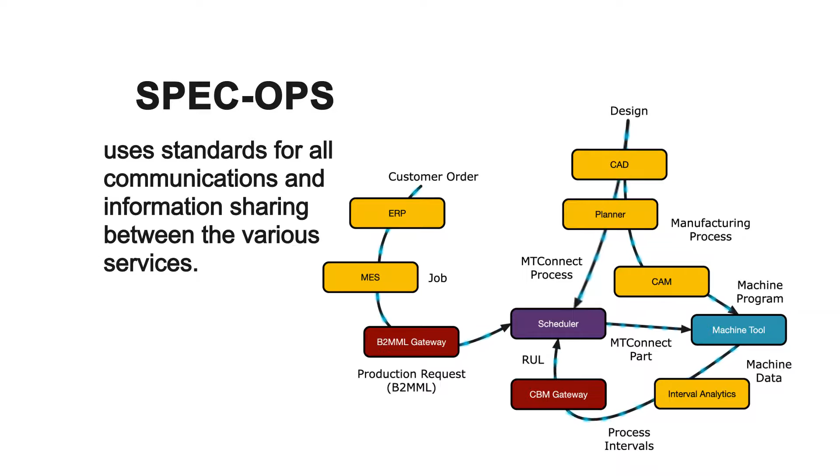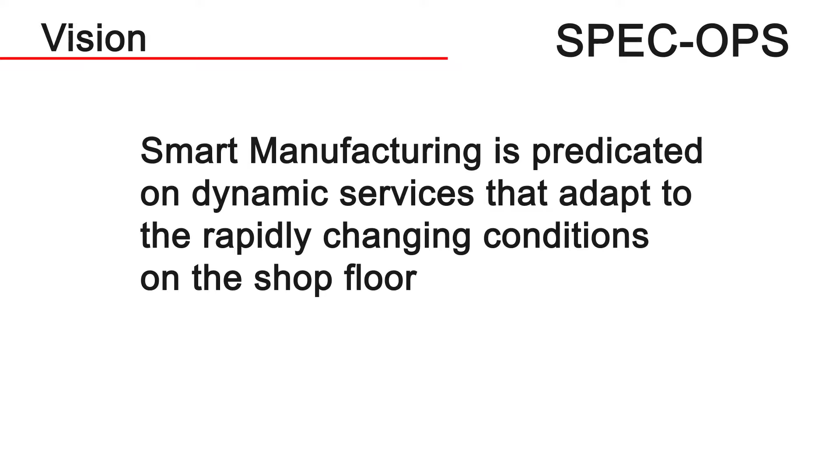SPEC-OPS provides the foundations for manufacturing systems to become self-aware. It allows these systems to dynamically describe themselves and their capabilities, and then track their capabilities during production with real-time feedback to planning and scheduling. Smart manufacturing is predicated on dynamic services that adapt to the rapidly changing conditions on the shop floor and accommodate changes in schedule, priorities, and equipment availability.

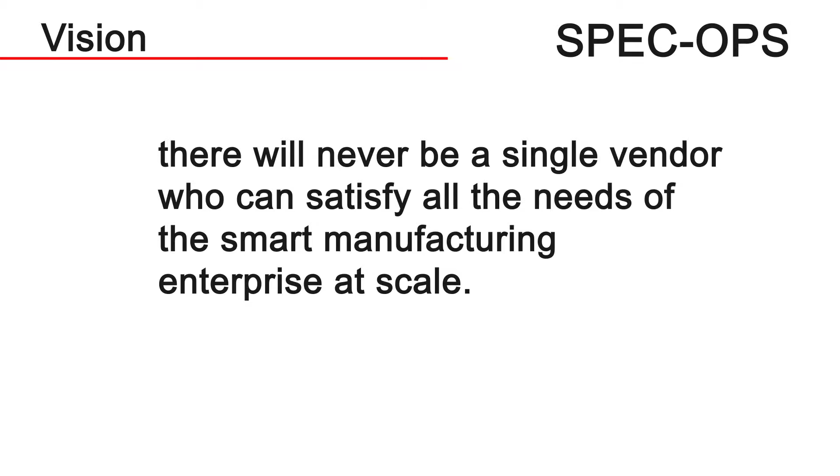There will never be a single vendor who can satisfy all the needs of the smart manufacturing enterprise at scale. But multiple companies working in collaboration can supply the components of the right solution at the right price. Standards allow for the greatest flexibility and choice for the user and prevent vendor lock-in, so the user can always choose the best technology to solve their problems.

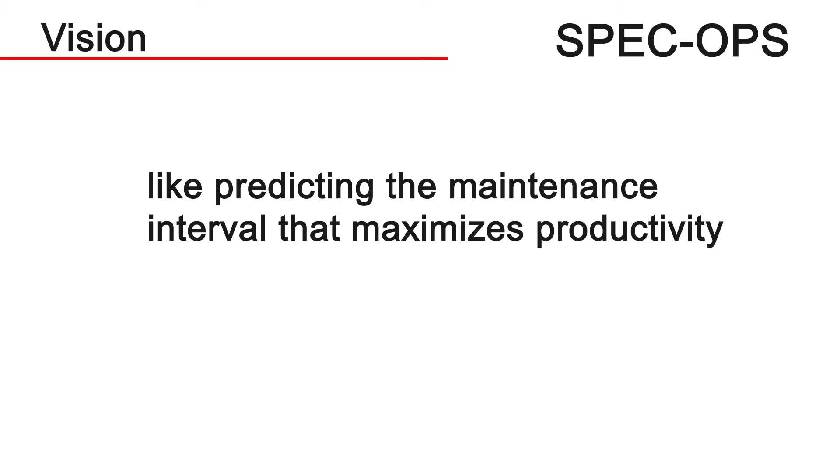Standards also allow companies to collaborate to overcome the biggest challenges in manufacturing, like predicting the maintenance interval that maximizes productivity, or provide optimal production routing for a given part given the current set of capabilities available.

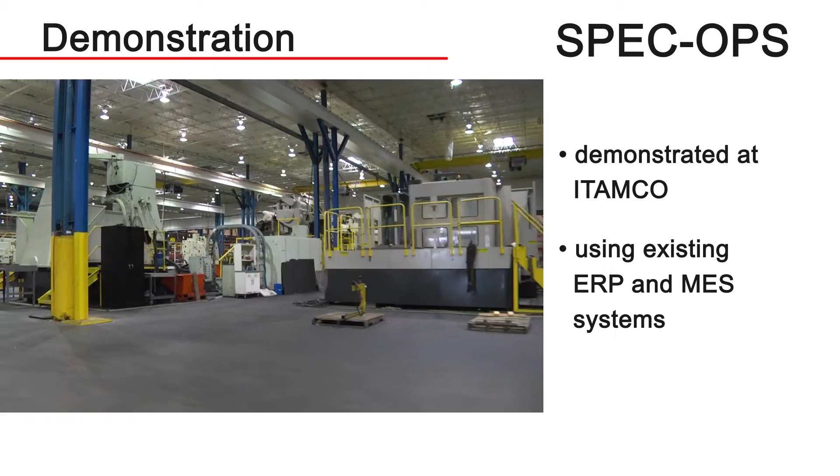The SPEC-OPS platform has been demonstrated at ITAMCO's shop floor using their existing ERP and MES systems. When an order arrives at ITAMCO, it is entered into the ERP system, and the material manager creates a matching manufacturing order in the MES system as usual.

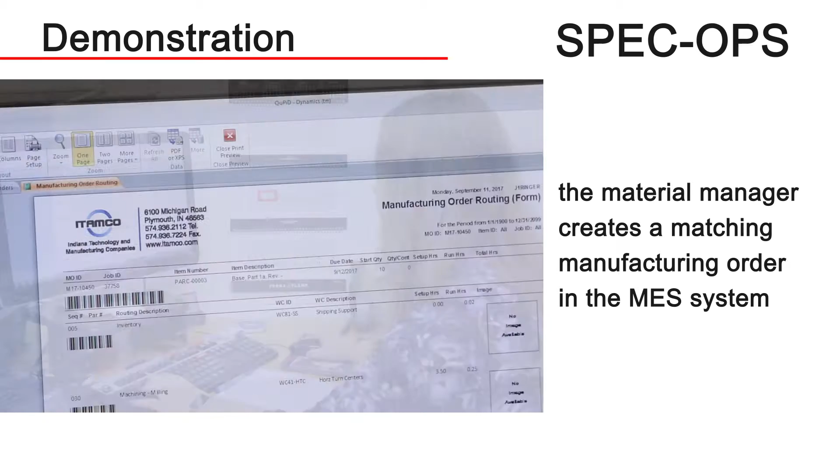The information from the ERP and MES systems is picked up in real time and translated into the XML representation of the ISA 95 Enterprise Control Standard in compliance with B2MML, the Business to Manufacturing Markup Language managed by MESA. This standard is posted to MTConnect, where it is made immediately available to the scheduling, planning, and production systems.

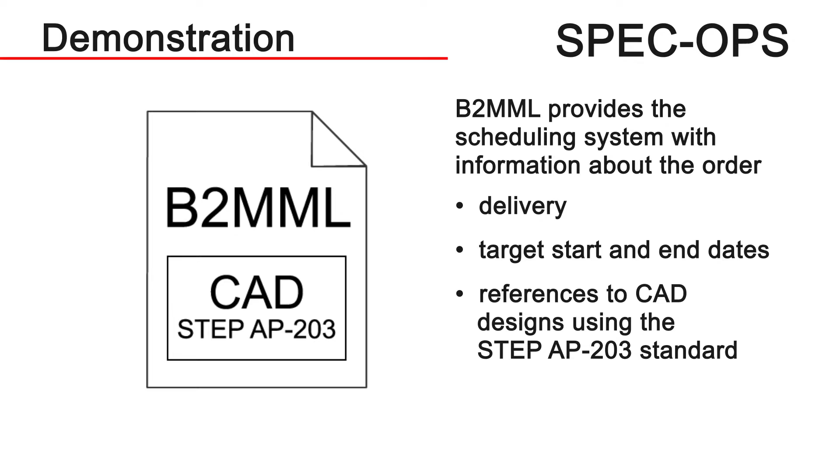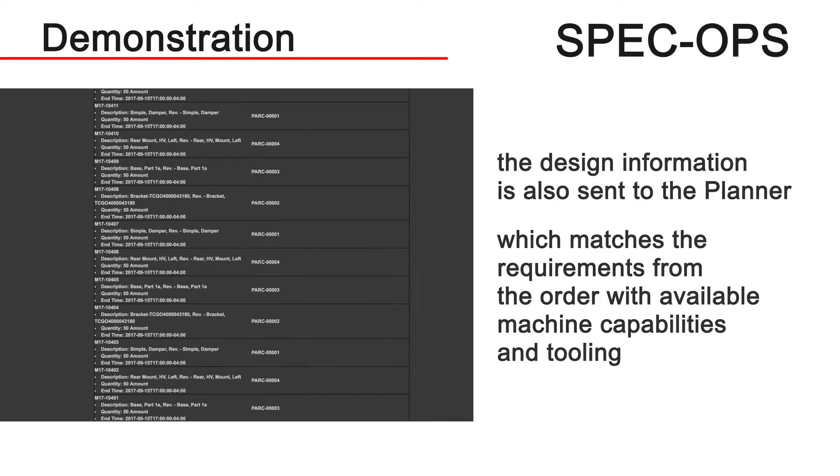B2MML provides the scheduling system with information about the order, including delivery, target start and end dates, references to CAD designs using the STEP AP203 standard, and material requirements. The design information is also sent to the planner, which matches the requirements from the order with available machine capabilities and tooling.

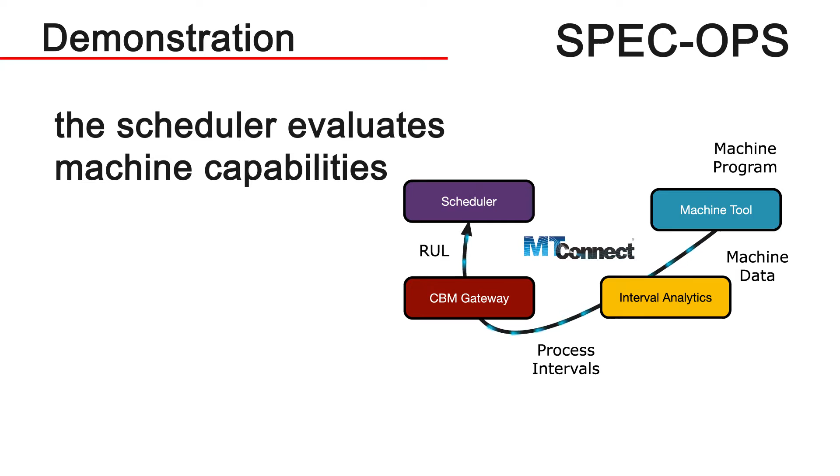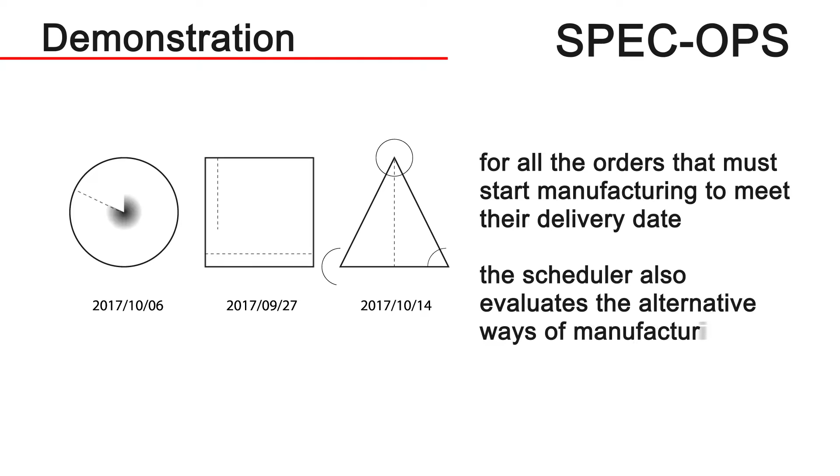The planner informs the scheduler about all the possible ways the manufacturing requirements can be met given the equipment. These possibilities are represented in a new MT Connect process information model that provides the routings and process requirements specific to discrete manufacturing. The scheduler evaluates the machine capabilities, assessing the current condition and health of every piece of equipment in the shop. For all the orders that must start manufacturing to meet their delivery date, the scheduler also evaluates the alternative ways of manufacturing each part.

Finally, the scheduler also takes into consideration whether the equipment has sufficient useful life remaining to complete the order. The remaining useful life calculations and the representations of the current process plans are represented in the MT Connect standard as well, and are being proposed for the next release of the standard.

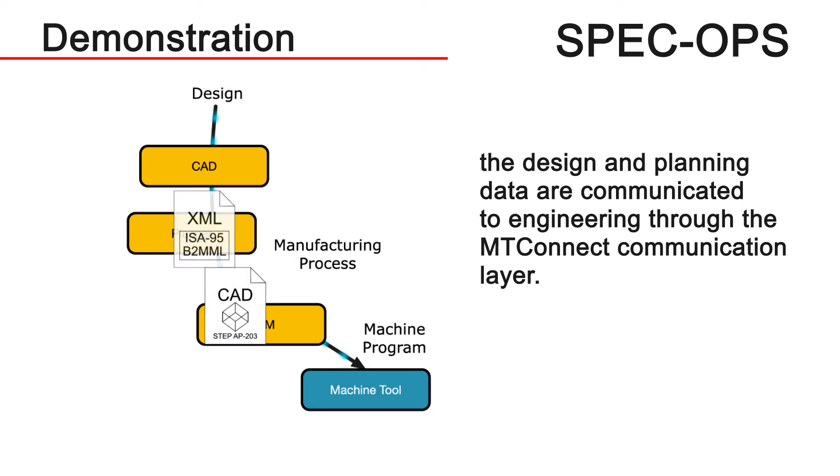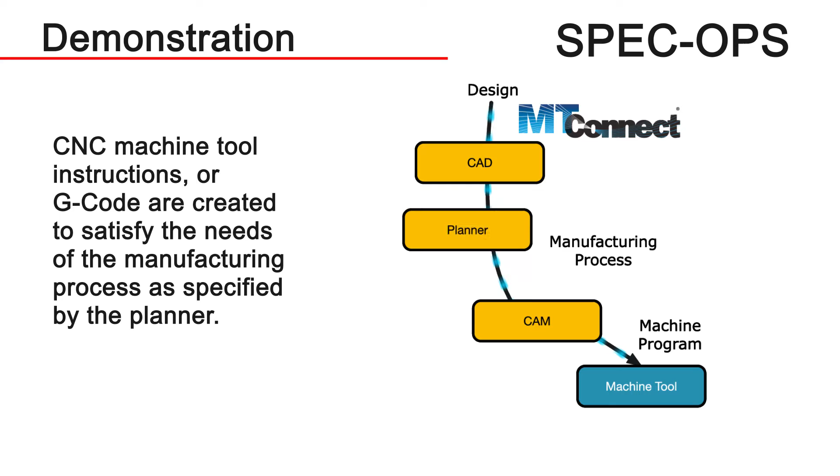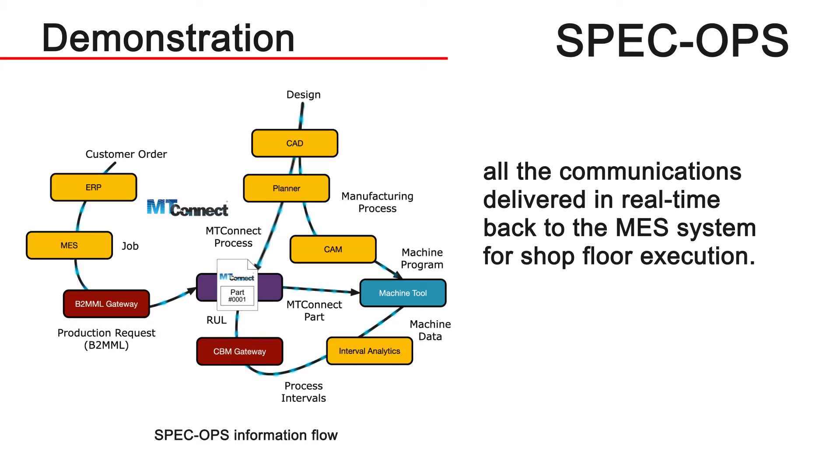The design and planning data are communicated to engineering through the MT Connect communication layer. CNC machine tool instructions, or G-code, are created to satisfy the needs of the manufacturing process as specified by the planner. The final process information is associated with the MT Connect part, which contains the final routing and schedule, cutting tools, and control programs necessary for production. As with all the communications, this is delivered in real time back to the MES system for shop floor execution.

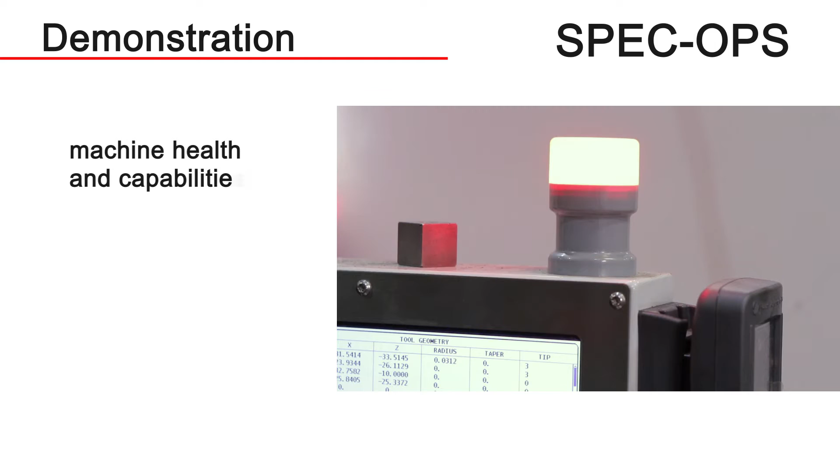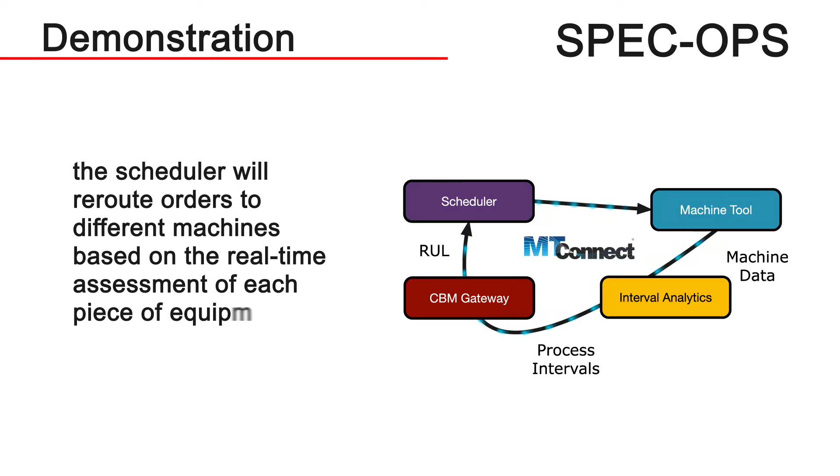Machine health and capabilities to perform certain jobs are determined by interval analytics that compute how long the machine is in various states. This data comes from the machine tools through MT Connect. The scheduler will then reroute orders to different machines based on the real-time assessment of each piece of equipment.

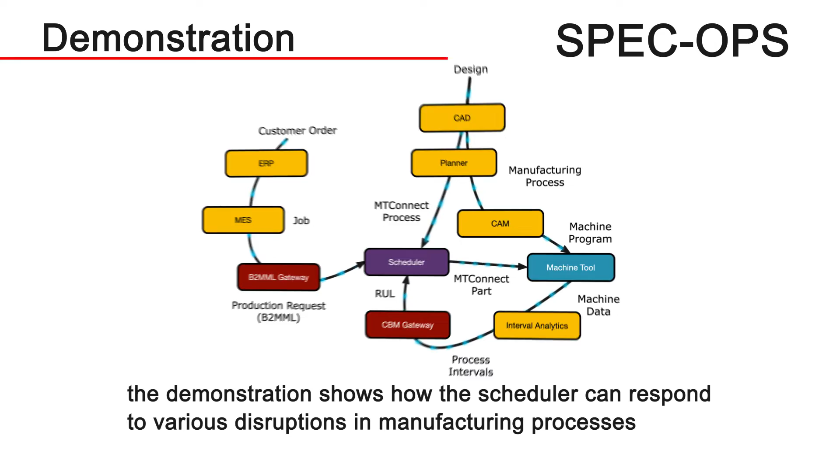The demonstration shows how the scheduler can respond to various disruptions in manufacturing processes, as well as predictively determine a new set of routings and processes based on the health of the machine.

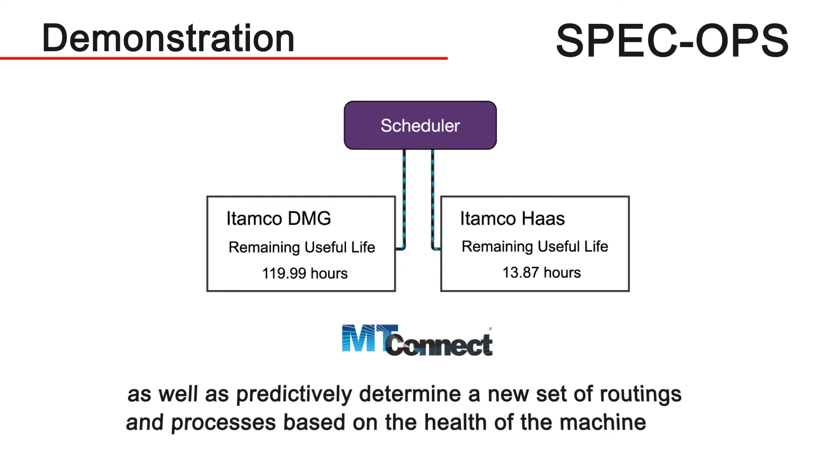SPEC-OPS provides us the foundation for the next generation of standards-based dynamic planning, scheduling, and tracking software. There's still more work to complete all the functionality and develop products based on the platform. But having the standards in place will increase the number of applications available and ease the implementation burden for all parties. The synergistic effect of these technologies will exceed any singular offering or capability and help increase our manufacturing productivity and agility.